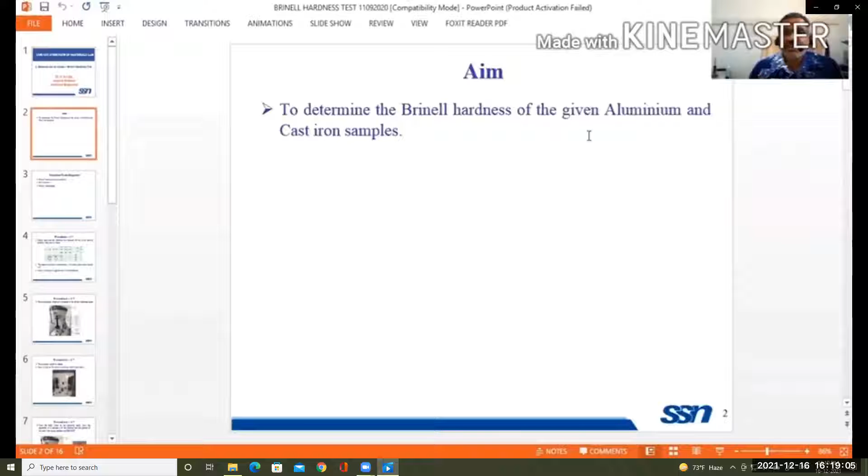This is a Brinell hardness test. The aim of this experiment is to determine the Brinell hardness number of the given aluminum and cast iron sample. Tools required are a Brinell hardness testing machine, ball indenter, and Brinell microscope.

Now the procedure: there are 7 steps. The first step is we have to fix the load and the duration of application of the load. Here there are 4 different metals given. The first metal we are going to use is ferrous. For ferrous, the corresponding load is 3000 kg and the time of load is 15 seconds.

Next, we are going to use aluminum. For aluminum, the load is 1000 kg and the time is 15 seconds. So for steel we use 3000 kg and 15 seconds, and for aluminum 1000 kg and 15 seconds. These are standard values. Next,

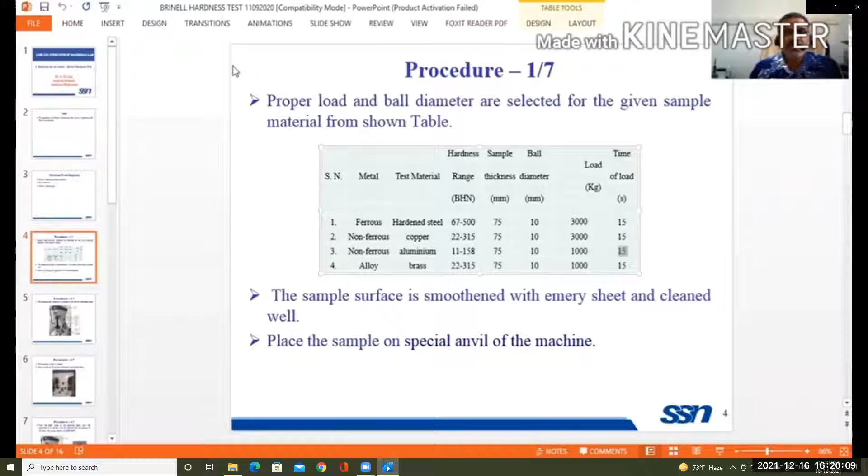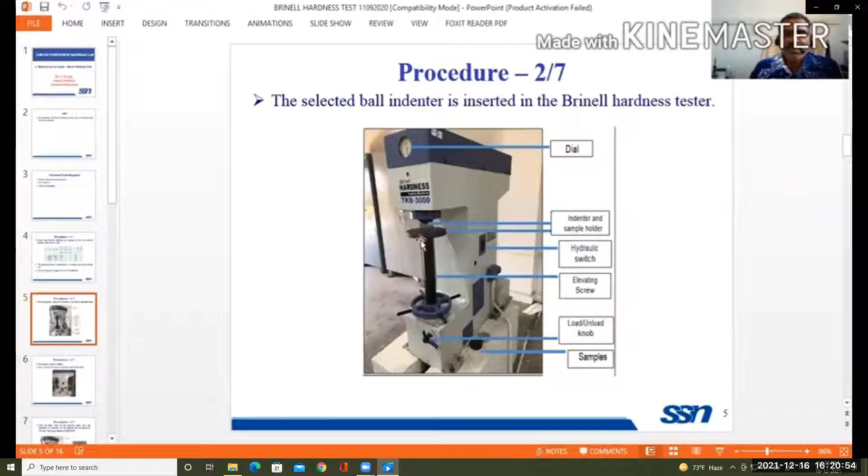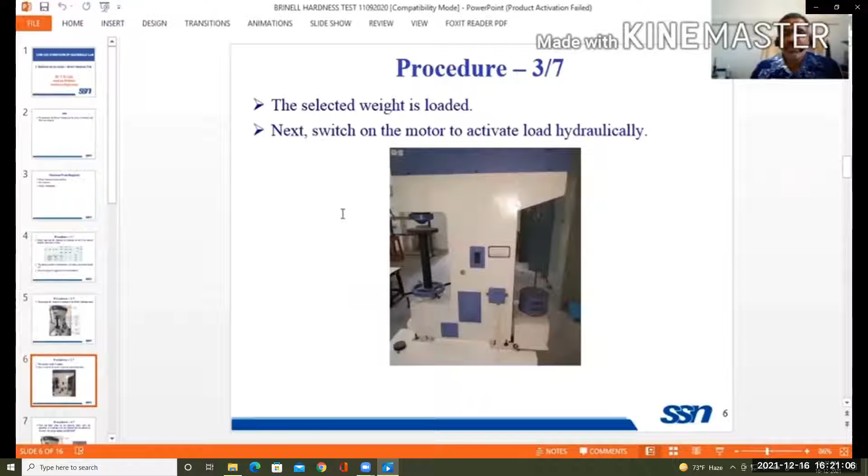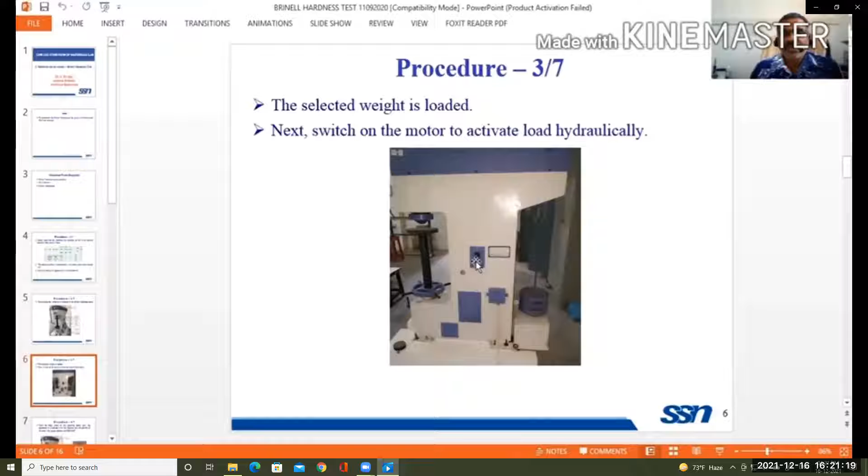Here we have the loading and unloading knob. When you rotate it clockwise, the load will be applied on the workpiece by the indenter, and if you unload it, it will be removed. Next, you have to select the weight. I already told you how much weight is to be applied. This is where you apply the load: for aluminum 1000 kg, and for steel 3000 kg. After that, you press this button and the load will be applied. It's a hydraulic system.

Here is where we fix the workpiece. By rotating the wheel, the screw moves upward, and the workpiece comes in contact with the indenter. Once the indenter has initial contact, see, there is a big dial, inside it a small dial, and an indicator. When the initial setting is over, it can be confirmed by the indicator: the indicator has to reach the red spot. Now the initial setting is over.

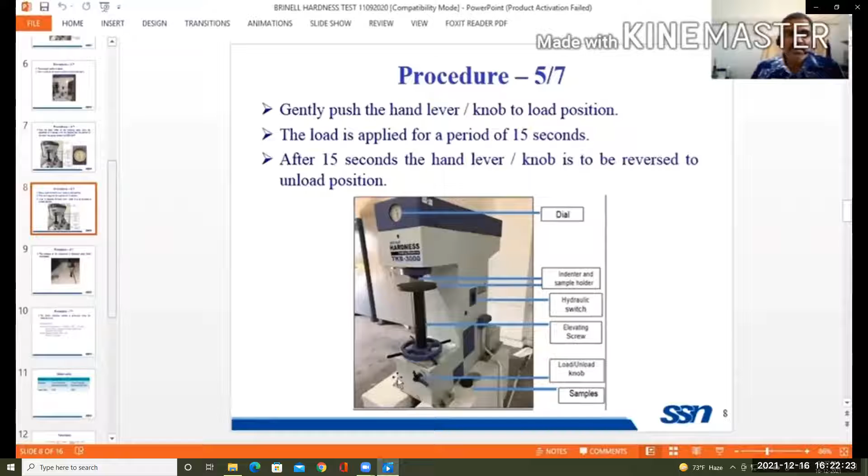After that, we have to apply the load. This is the loading knob. Rotate it clockwise, the load will be applied, and you wait for 15 seconds. After 15 seconds, you remove the load. After the load is removed, you take the workpiece, and this is the Brinell microscope.

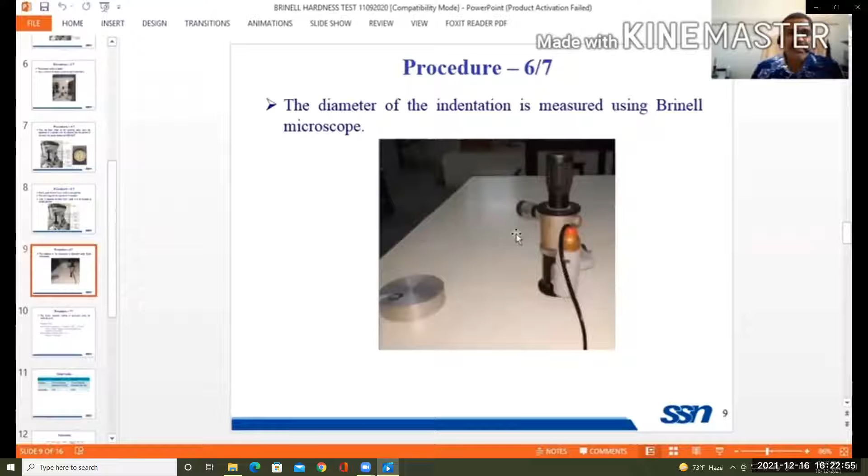The purpose of the Brinell microscope is to measure the diameter of the indentation. After the indentation is formed, you use the microscope to find its diameter. We already know the diameter of the indenter: it is 10 mm. After that, you have to do the calculation.

So the Brinell hardness number is load divided by area. Substitute the area in millimeters and the load in kg. It will give you a number without any unit, the Brinell hardness number, which gives the indication of hardness.

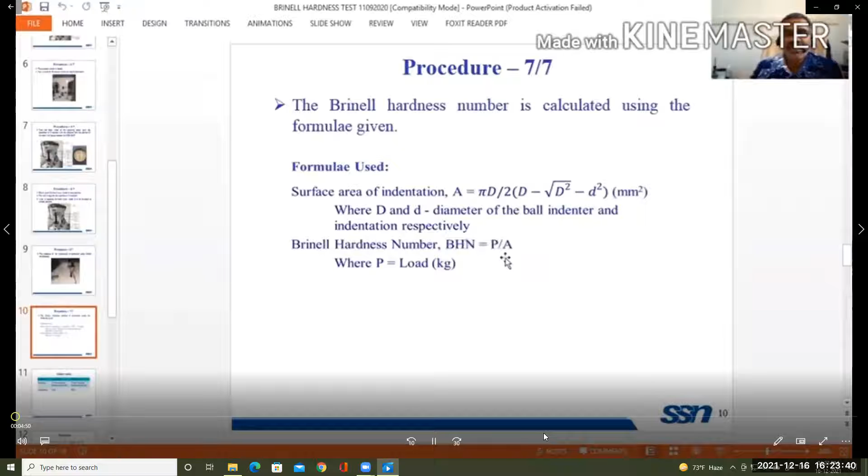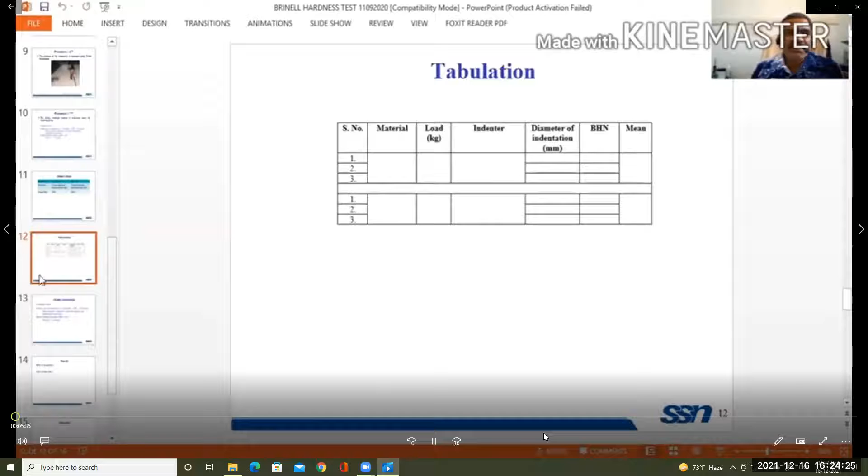Then you have to write the mean. We have taken only one reading. You write that reading. So this is the equation for calculation. Finally, results: you write the Brinell hardness number of aluminum and Brinell hardness number of cast iron.

Good morning. So this is the Brinell hardness experiment. This experiment is also used to calculate the hardness of metals. In the Rockwell hardness, we have seen how to calculate hardness of steel and aluminum. So here also we are going to calculate hardness of steel and aluminum only. But the thing is, this is another procedure.

As I told already, there are different scales available for measuring temperature: degree Celsius, Kelvin, Fahrenheit. Here also, this is another scale. Already we have seen Rockwell hardness. This is Brinell hardness. So here there is a set of procedures to calculate the hardness of a material.

But here in Brinell, we are using one indenter. The indenter has a dimension. When some force is applied on the workpiece, it creates an indentation. So here there is an equation to calculate the hardness. The equation is a function of indenter diameter and indentation diameter. So the indenter has a diameter. When it is pressed against the workpiece, it will form an indentation that will have a diameter.

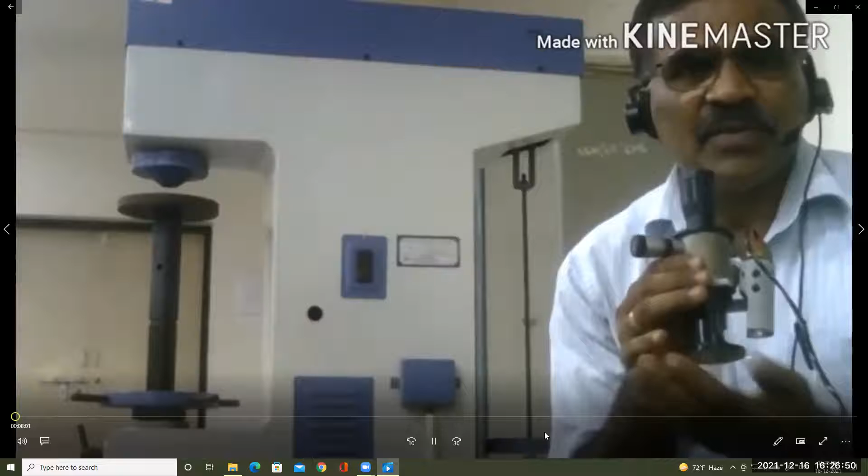indentation. So now we have the dimension of the indentation and the dimension of the indenter. By using these two, you will be able to find the hardness. So this is the procedure. The procedure is almost similar to the Rockwell hardness. But in the Rockwell hardness, the reading is directly given, but here we are measuring the diameters, and using the diameter we calculate the hardness. That's the only difference.

But the value may be different; it has another scale. So if you want to compare the hardness of different materials, you have to go for the same scale. Rockwell and Brinell cannot be compared. If you want to compare, you take the Brinell hardness for all materials. So it is a different scale. Now let us see how to do the experiment.

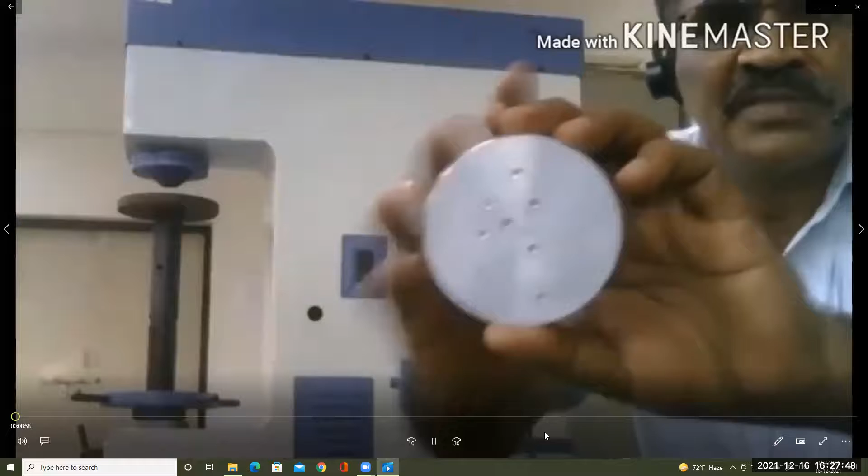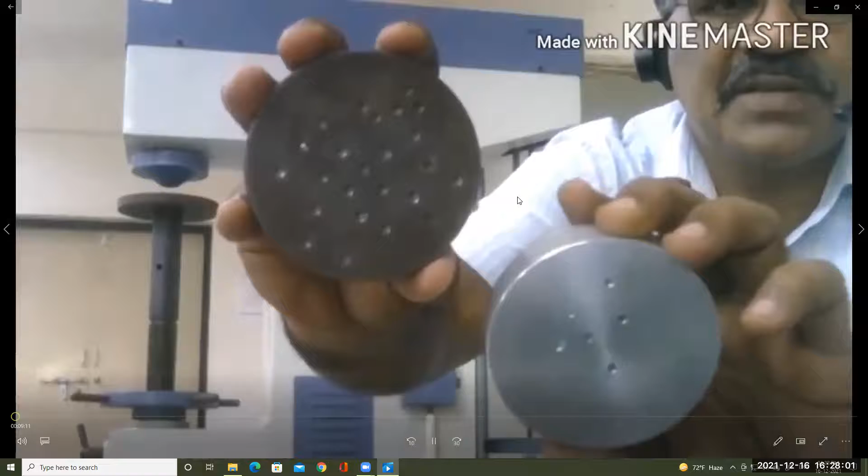So as we saw earlier, this is the aluminum piece. Sir, in the steel. This is the aluminum piece, and this is a steel piece. So now we are going to conduct the experiment on the aluminum piece as well as the steel piece. First aluminum. Here the loading conditions are different. The indenter is going to be the same for the two different materials, and the loading condition is different.

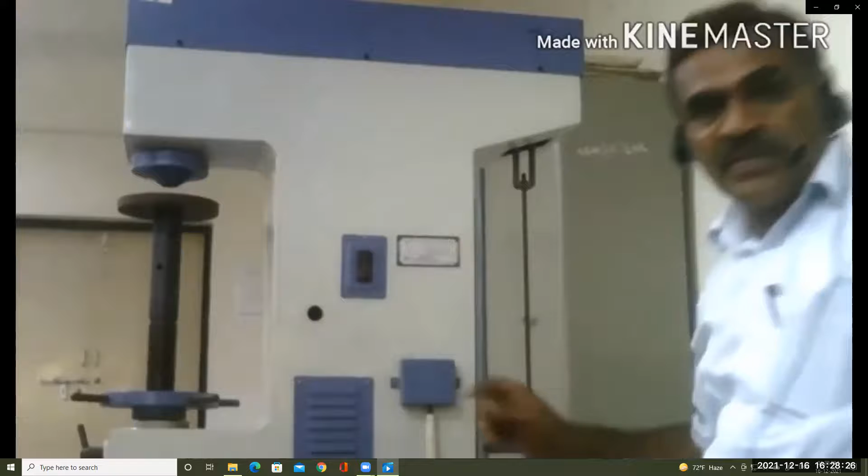For aluminum we are going to use 1000 kg. Here you have to apply the load. In case of steel, we are going to apply 3000 kg. In the previous case it was different, 100 and 150, but the indenters were different. Here, same indenter, but the loading condition is different. For aluminum it is 1000, for steel it is 3000. So you have to just follow the procedure. Now let us see how to do the experiment.

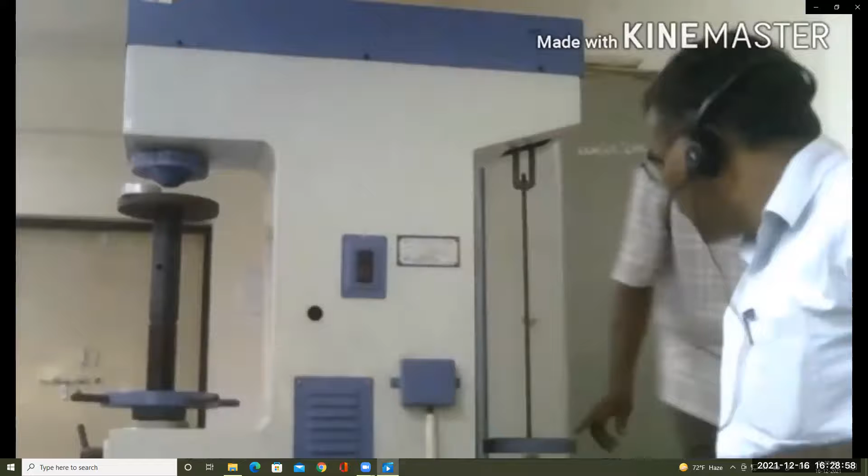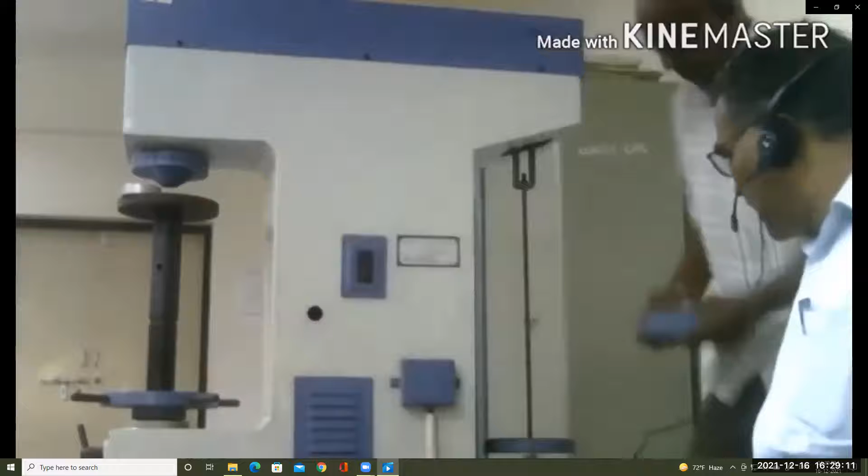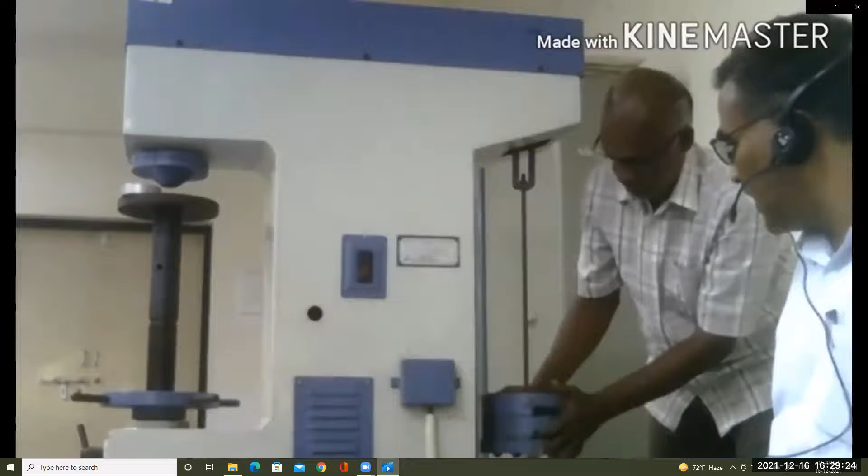Now here already 1000 kg is there. Sorry, 500 kg is there. We have 500 kg already. Now 250 kg we are going to put. This is 250 kg. So now 500 plus 250, it is 750. Again one more 250 kg. So now totally 1000 kg. This is for aluminum.

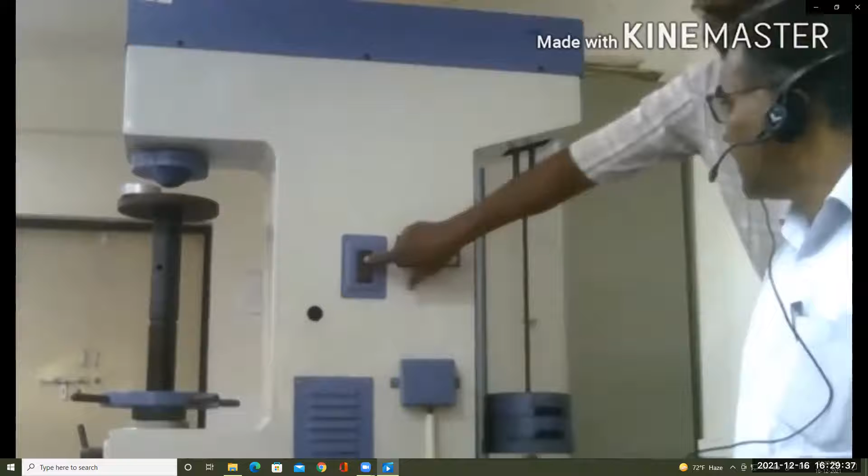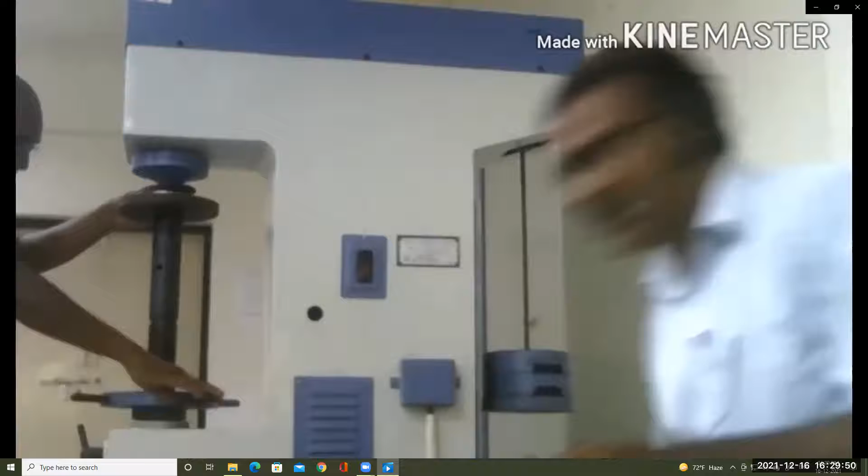Now this is operated by hydraulics, so you have to switch on the hydraulic mode. Yes. Now the load is applied; the hydraulic is on. Now he is fixing the specimen. See, so he is fixing the specimen.

If you rotate the wheel, the specimen is going upward. He is selecting a place where there is no indentation. Now it is just touching it. You have to give the minor load; that is the initial setting.

When he rotates the wheel, slowly it will go up. At the same time there is a dial. In the dial, it has to show 0. Till then you rotate it. Is it okay? Okay. Now it is 0.

So he was rotating the wheel. When you rotate the wheel, the workpiece is going against the indenter. A minor load is acting. At that position, the indicator is showing 0. So the initial setting is over now. Minor load is applied. Now we have to apply the load.

In the previous case, in the Rockwell hardness test, we applied the load slowly. There is no time. But here there is a time setting. Load has to be applied only 15 seconds. You switch on the timer, apply the load. Exactly at the 15th second, you stop it. You unload it.

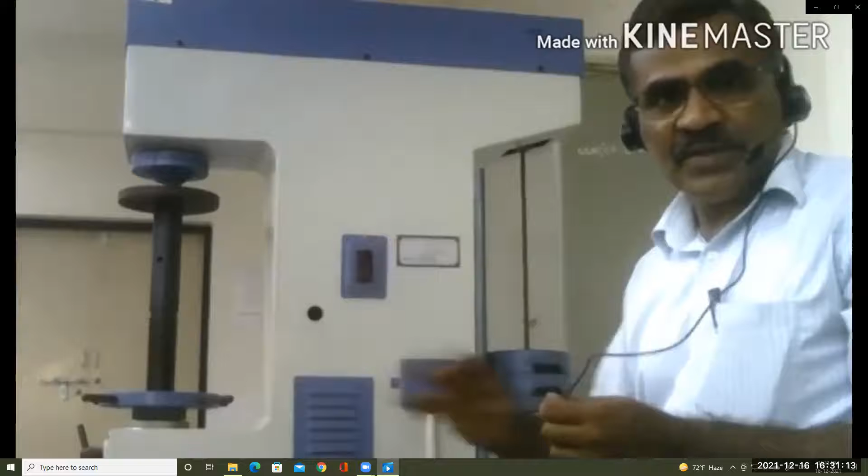Right. Now he is applying the load and seeing the time. 1, 2, 3, 4, 5, 6, 7, 8, 9, 10, 11, 12, 13, 14, 15. Time is over. Now it is unloaded. Now you can release.

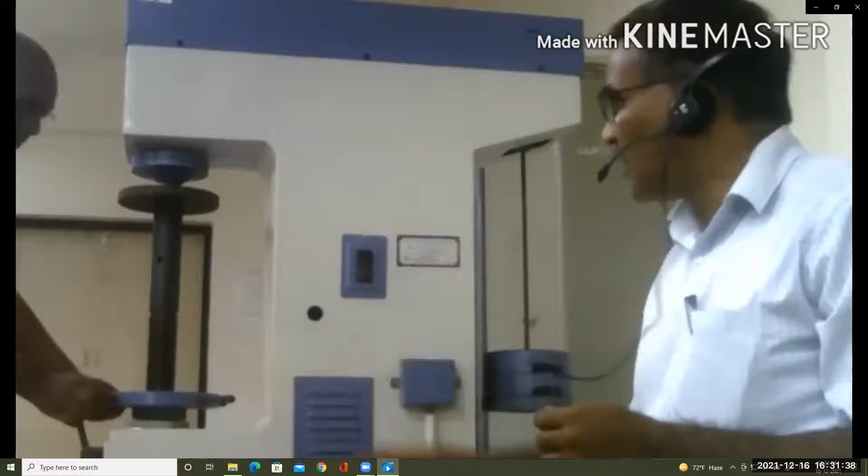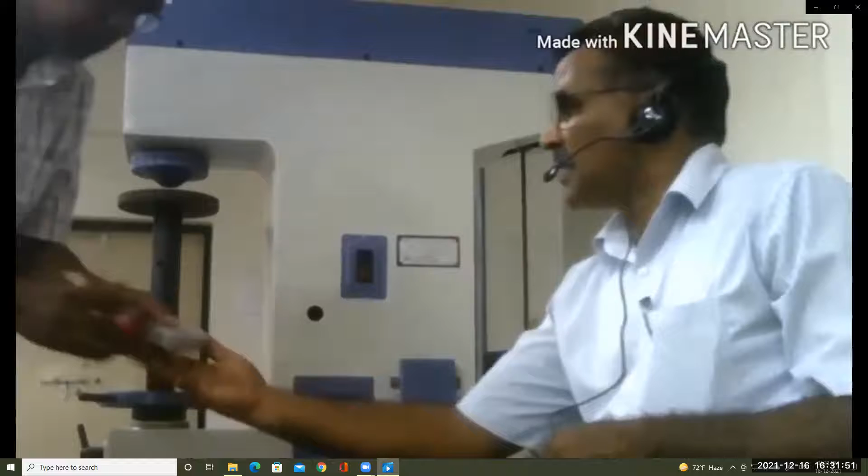Now the experiment is over. Now he is releasing it, rotating the wheel in the opposite direction. The specimen is coming down. Now he is taking the specimen. Now you can see this is an indentation. There's a circle. Inside the circle, the indentation is formed.

Now, what do you have to do with the microscope? In the microscope, you have to find the diameter. So this is a microscope. You keep the microscope on the workpiece and find the dimension. Now sir will measure the dimension and tell. Now he is finding the diameter of the indentation: 3.6 millimeter.

That can be measured using a small microscope. Already we know the diameter of the indenter is 10 millimeter. The 10 mm indenter is used to produce the indentation. The 15-second time was given for loading. So the diameter of the indentation is 3.6 millimeter. So using these two diameters, you will be able to find the hardness.

Diameter of the indentation and diameter of the indenter will give the hardness. There is an equation you can refer to.

Now we are going to test the cast iron specimen. Okay. You have already seen the cast iron specimen. Lots of indentations are there. You have to select another place where indentation is not there.

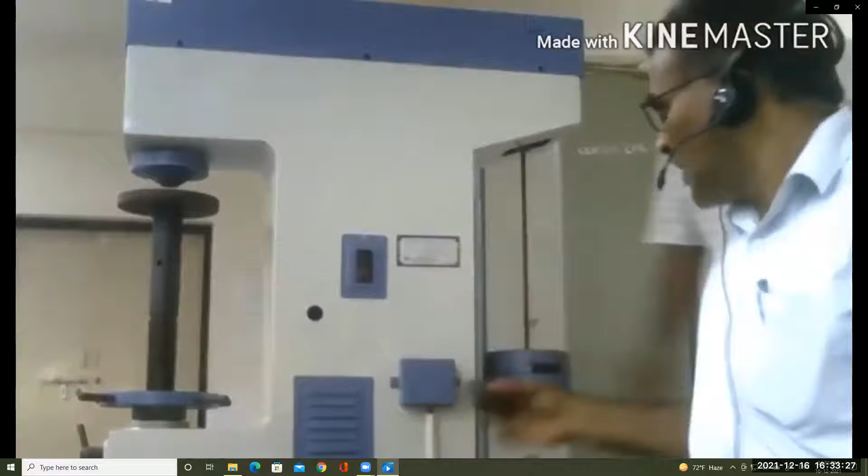So now he is going to apply the load. Already how much load is applied? 1000 kg is there. Now 2500 kg, 2750, and finally 3000 kg. Now 3000 kg is applied. Already it is in on position.

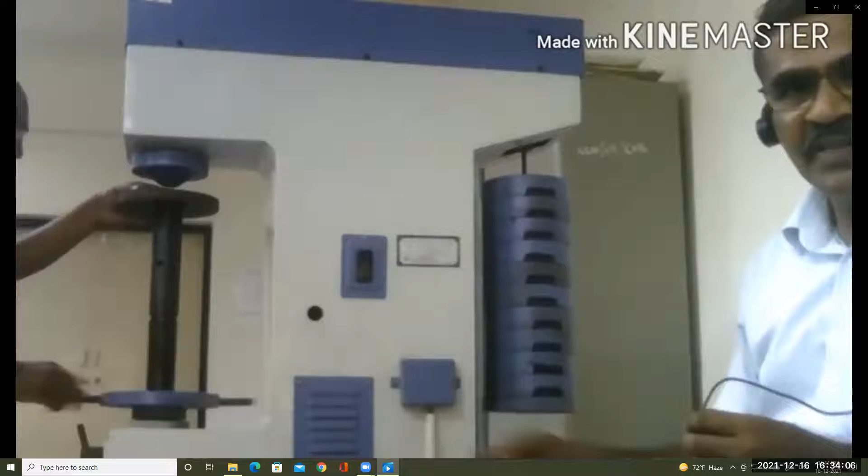Now he has taken the cast iron specimen. He is fixing it. Now he is rotating the wheel. You keep the specimen and rotate the wheel. Now it is in contact with the indenter. After having contact with the indenter, again you rotate for some time till the reading is showing 0.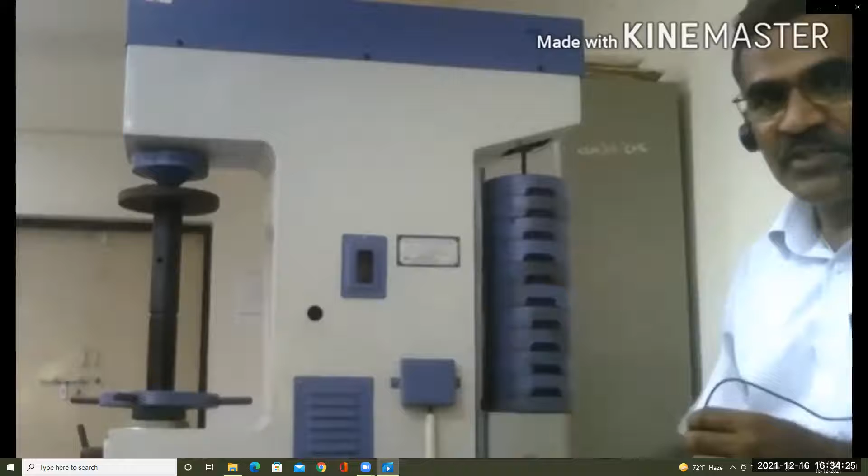Now the reading is also 0. So the minor load is given. Initial setting is over. Now we have to apply the load. How many seconds? 15 seconds. You have to apply the load for 15 seconds.

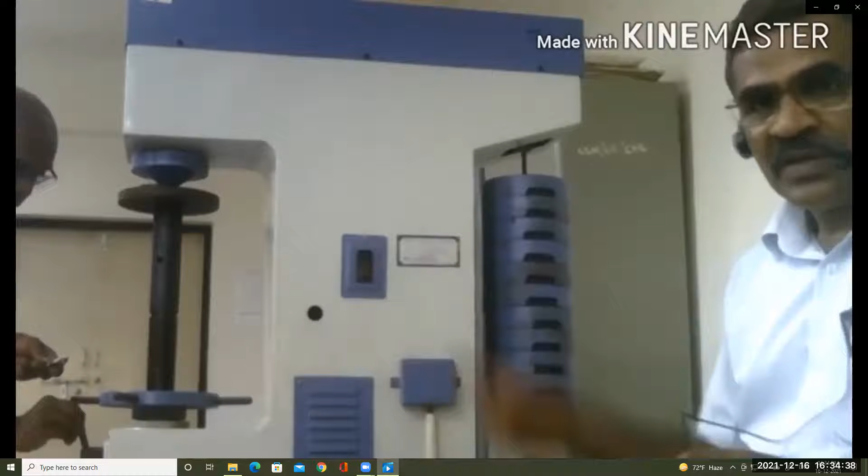Now he is applying the load. He is waiting for 15 seconds. 15 seconds is over. Now he stopped the loading.

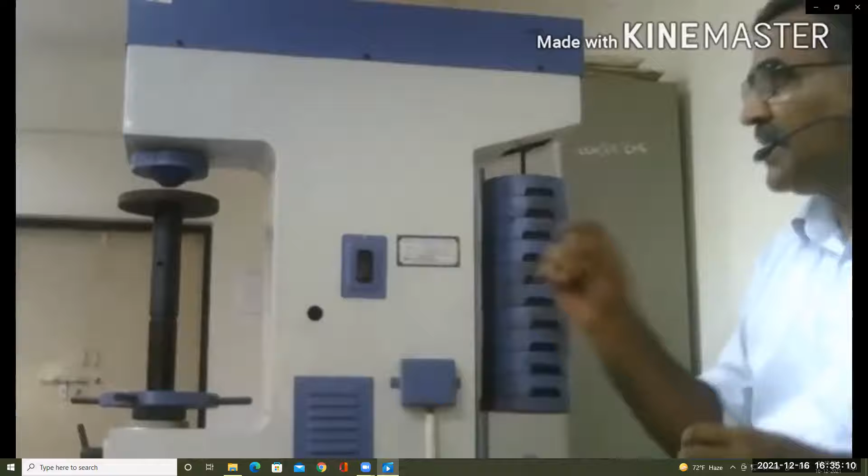Now you rotate the wheel. The specimen is coming down. You take the specimen and mark the indentation. Now you can see the indentation. Now it is marked in red color.

Now what is the next step? Next step is measuring the diameter of the indentation by microscope. By using the microscope, the diameter is measured.

It is 4 mm. Diameter is 4 mm. Now, already we know the diameter of the indenter. How much is the diameter? 10 millimeters.

Hi, this is a video session on Brinell hardness testing. Hardness is basically the resistance offered by the material against surface penetration or scratches. This property is normally measured in a material testing laboratory by evaluating the resistance of the material to local plastic deformation, which is obtained from the indentation of a predetermined geometry indenter onto a flat surface of the workpiece or part under a predetermined load. Hardness is one of the very important parameters in the study of wear of any component.

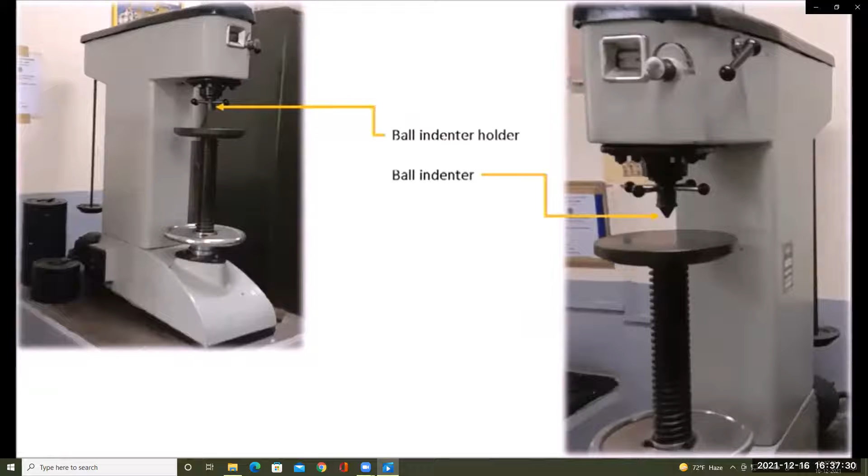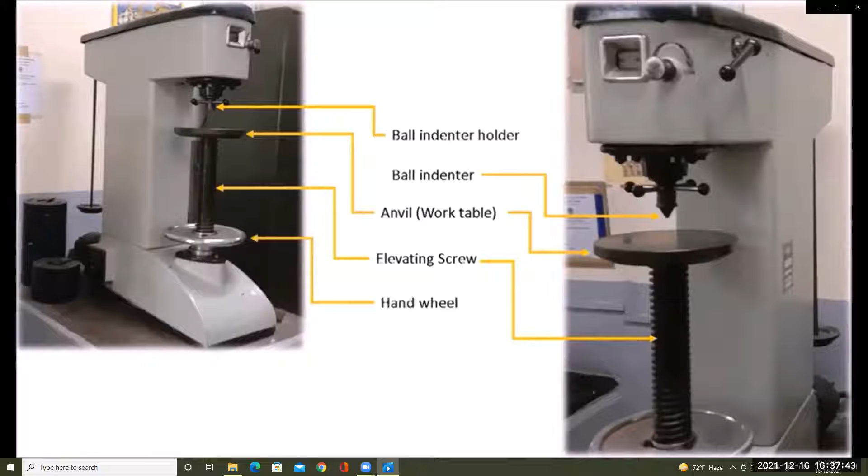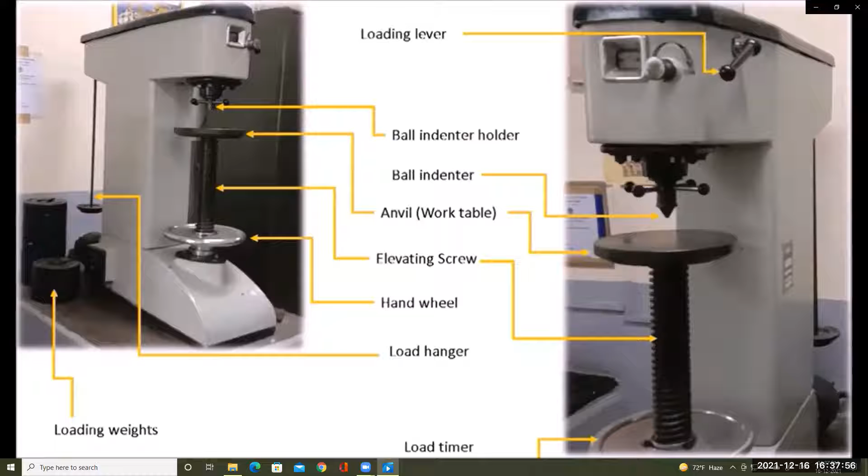Let us have a look at a typical Brinell hardness testing machine. It has a holder for the ball indenter, a ball indenter which will penetrate into the workpiece when the load is applied, an anvil or work table where the specimen is mounted during testing, an elevating screw for the vertical movement of the anvil, a hand wheel for operating the anvil, a load hanger at the back side of the machine, different loading weights, a lever for loading, a timer display and on-off switch.

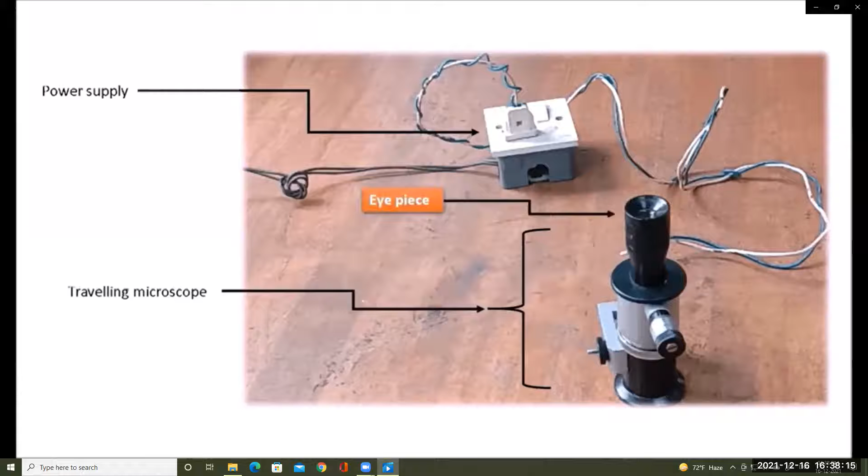Further, a traveling microscope is used for the measurement of indentation. It requires a power supply. It has an eyepiece using which the indentation can be viewed and crosswires can be adjusted. It also has a micrometer for recording the reading.

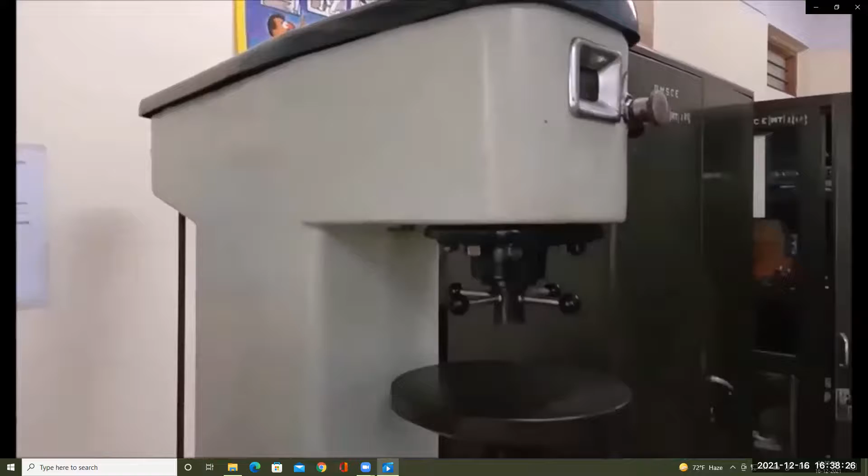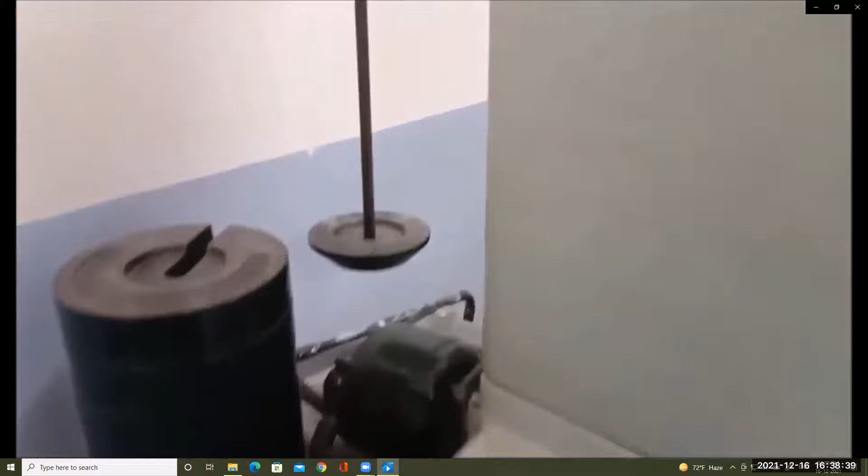Now quickly have a close look at all these parts of the setup. This is the Brinell hardness testing machine. And this is the traveling microscope.

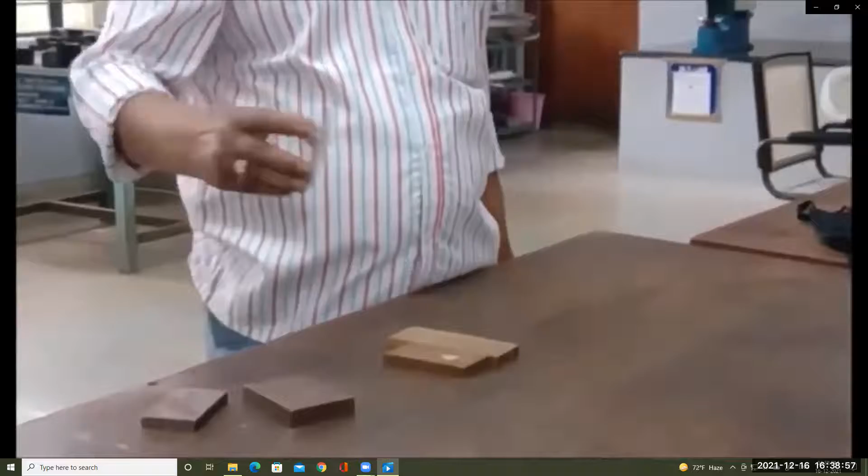Brinell hardness test can be performed on metals such as mild steel, cast iron and so on. Let us identify the different commonly used specimen materials. This is a mild steel specimen.

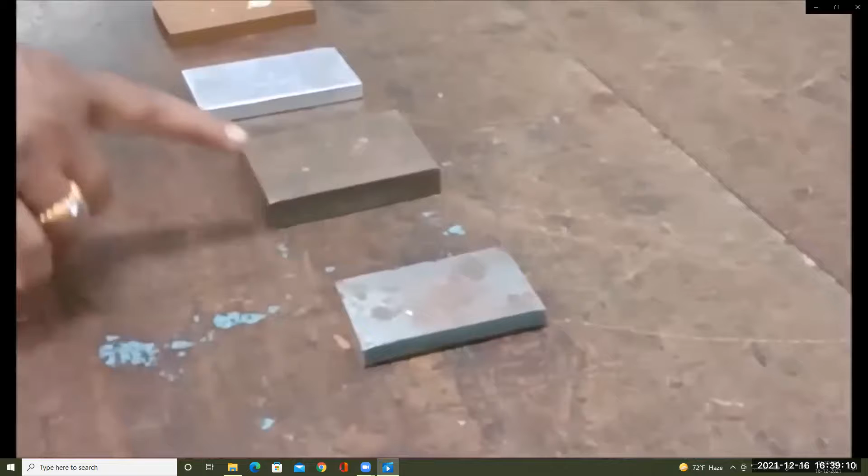This is how a cast iron specimen looks like. This is an aluminium specimen. This is a copper specimen. And this is the brass specimen.

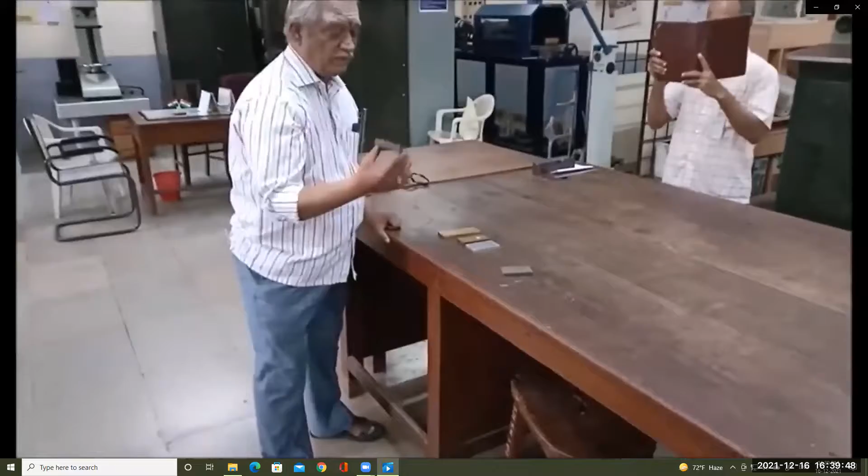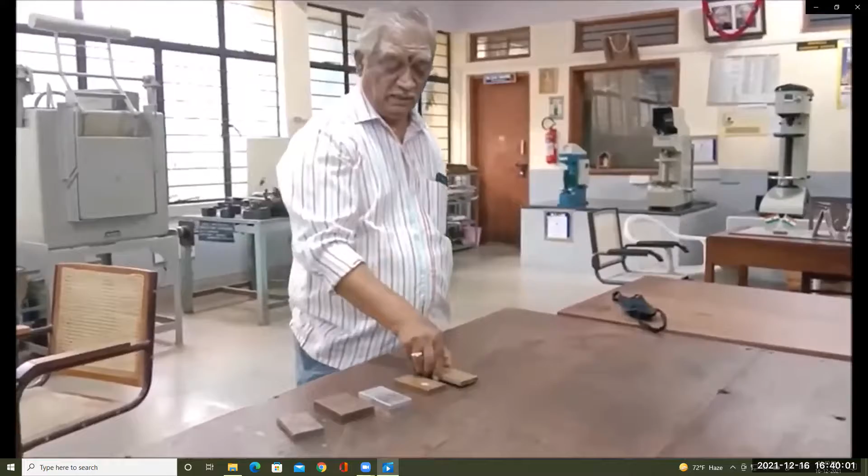One can hear a bell sound when a mild steel specimen is dropped on the flat surface. It will be a dull sound for the cast iron specimen. Aluminium is whitish in color. Brass is yellowish or dull gold in color. And copper is reddish brown in color.

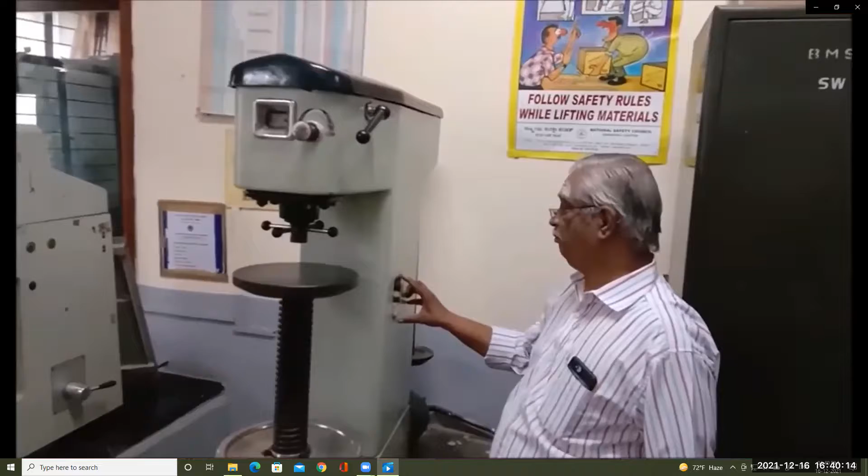This Brinell hardness testing machine has a capacity of 3000 kg. A 10 mm ball indenter is inserted into the holder. Here is the on-off switch. Grey button is on, red button is off.

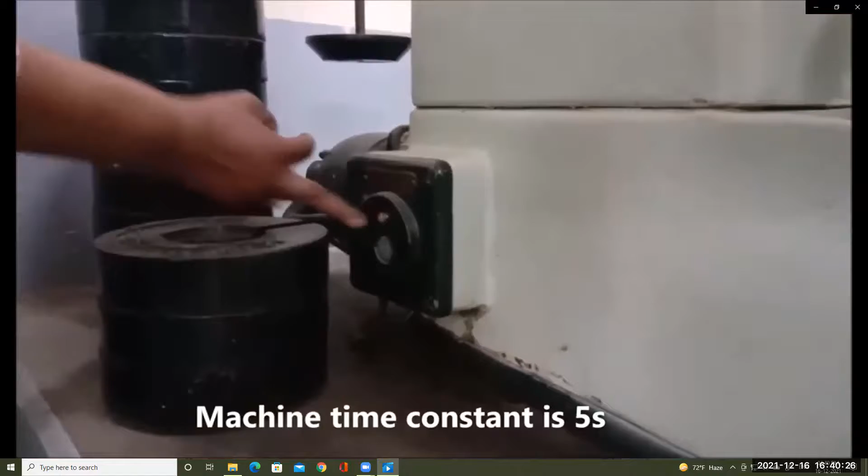Manufacturer of the machine has provided standard load values, duration of application of load, and the diameter of the ball indenter to be used for different specimens. You can see the details on the screen now.

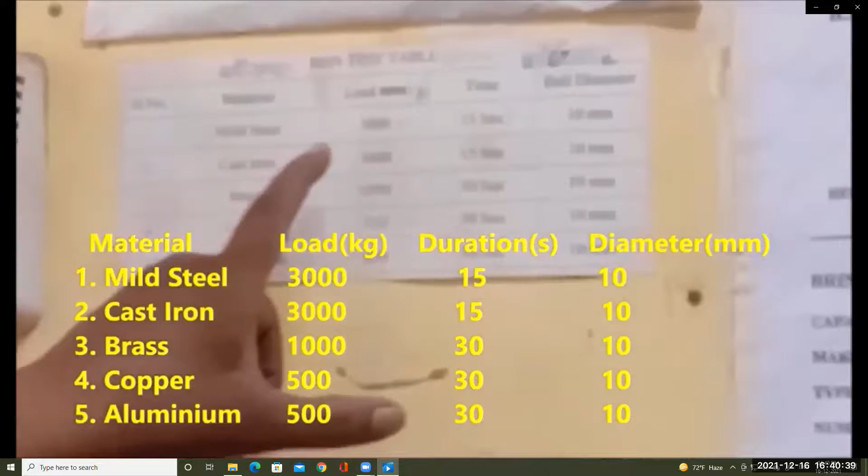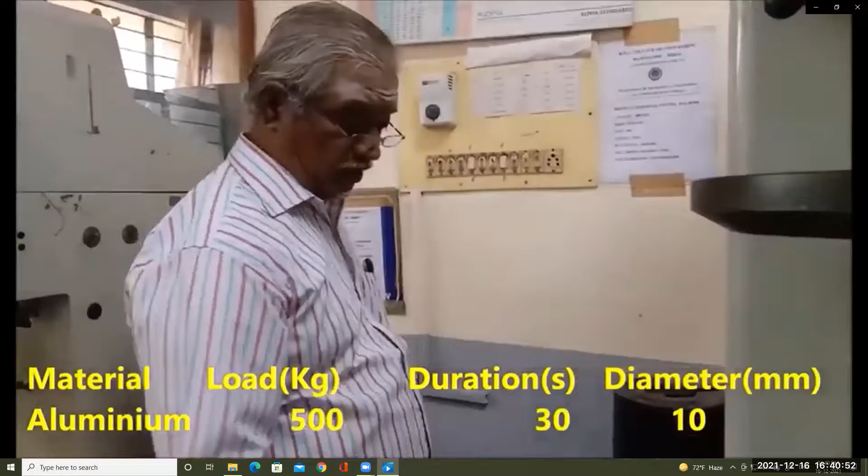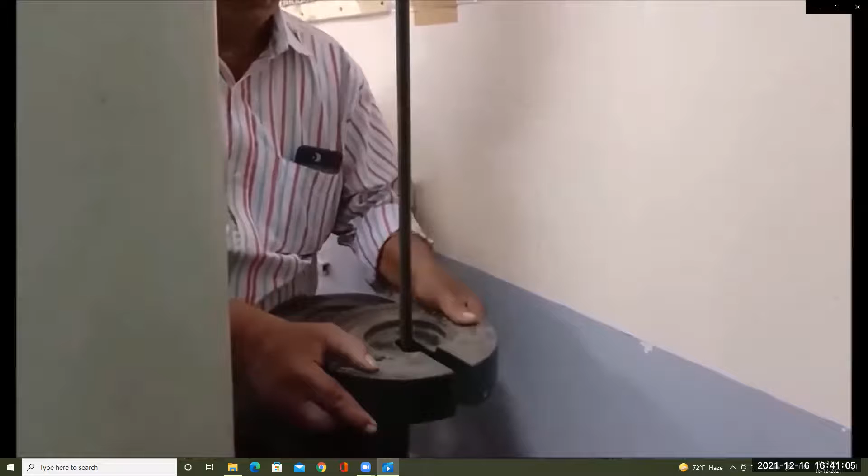Let us take an aluminum specimen for this demo of the experiment, for which we have to use a load of 500 kg for a duration of 30 seconds. Weight of the hanger itself is equivalent to 250 kg. An additional equivalent weight of 250 kg is added onto the hanger, making a total weight of 500 kg.

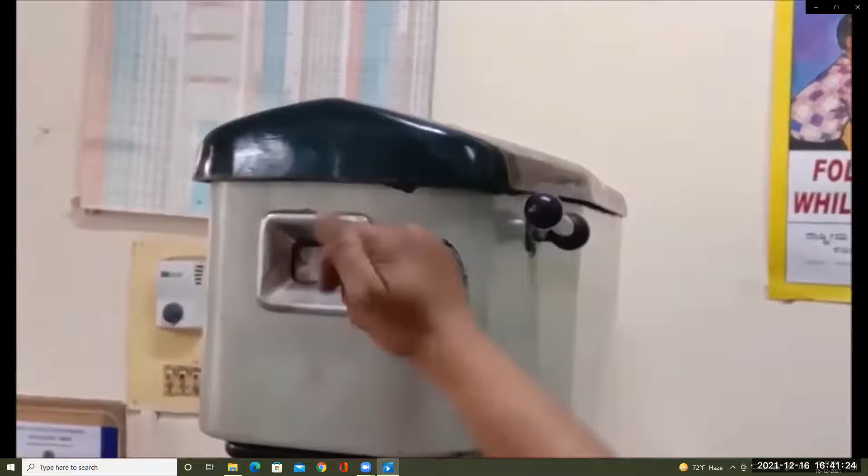By turning the knob near the timer display, you can control the movement of the display object from set to no set. Counterclockwise turning will make it faster and clockwise turning will make it slower. Now, by using a stopwatch, adjust the movement from set to no set time to 5 seconds. This is an initial setting for the timer.

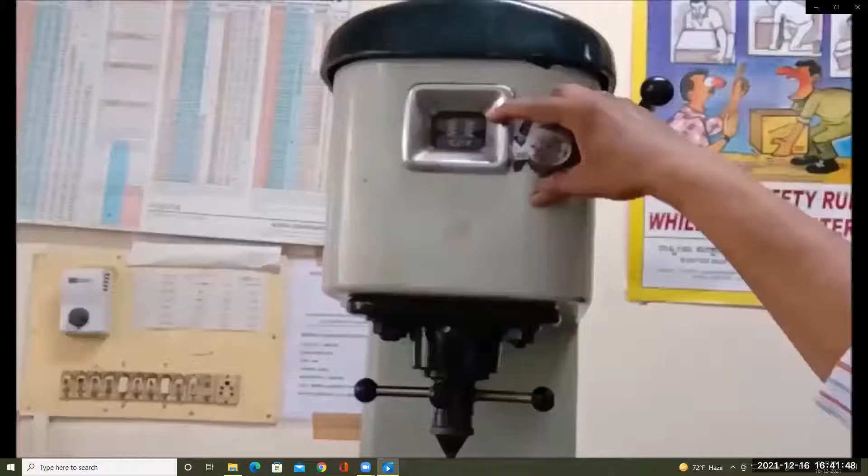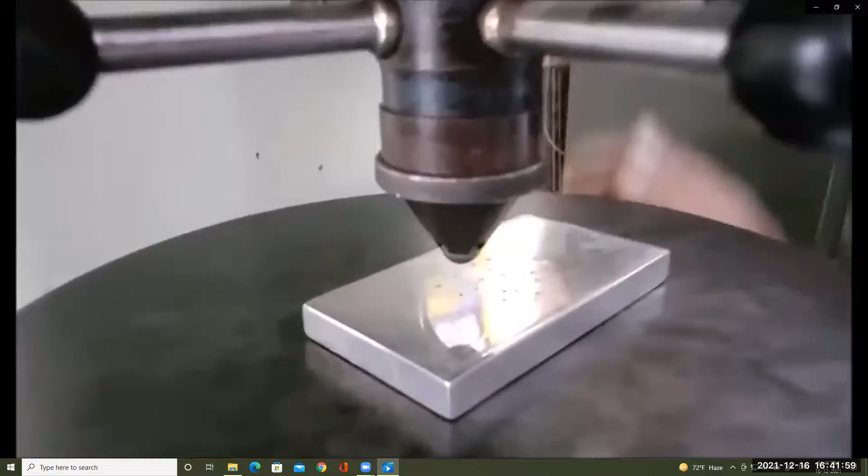Switch on the machine. Initially, make sure of the set position of the timer display. Position the specimen on the anvil. Turn the hand wheel such that the work table moves vertically up until the specimen makes contact with the ball indenter. Now, you can start loading the specimen by pressing the load lever down and starting the stopwatch at the same instant.

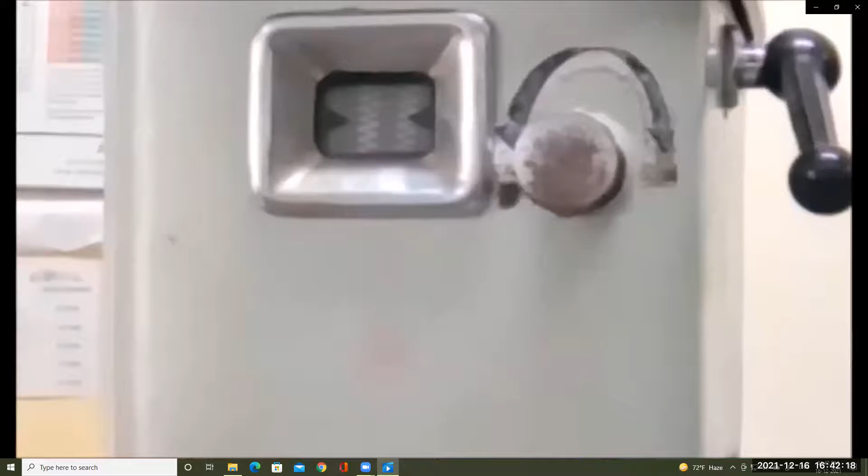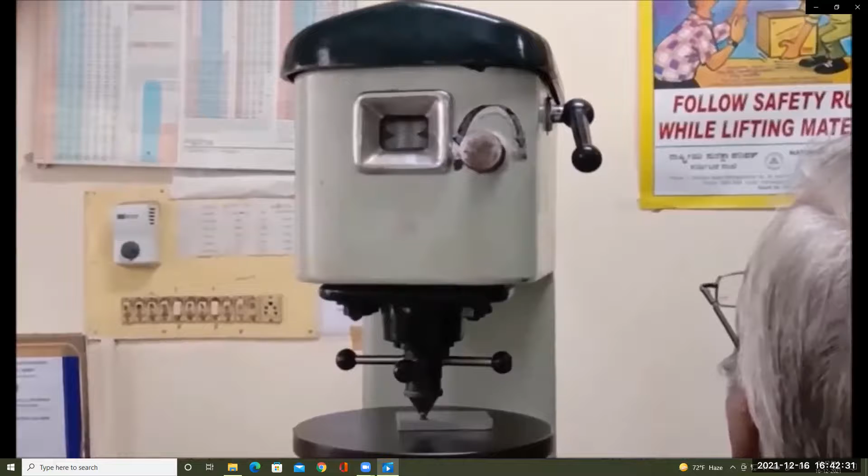After 30 seconds, unload the specimen by turning the load lever up.

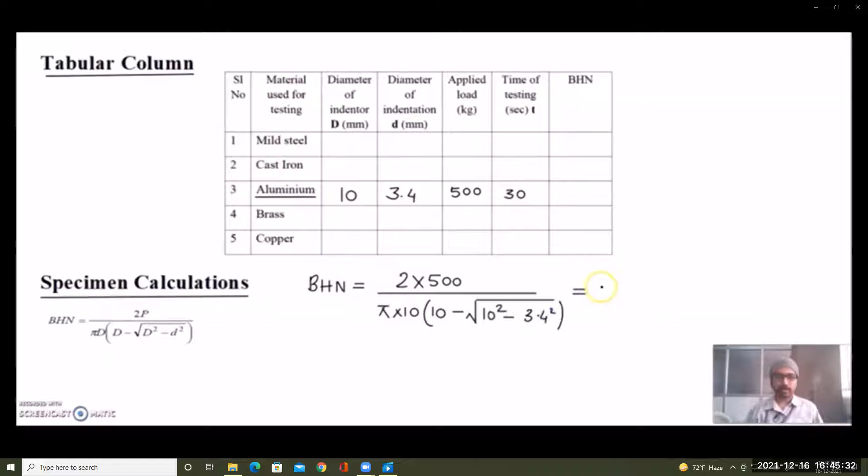Dear students, I am teaching you the course Material Testing Lab for 4th semester Mechanical Engineering students as per the syllabus. In this lab, we will study a number of materials and their varieties of properties. Understanding these properties is important because it affects the application, stability, and failure of the material. We can understand materials only when we understand their properties.

We shall learn about hardness, particularly Brinell hardness, how to conduct the Brinell hardness test, and what the Brinell hardness number is. What is hardness? Hardness is the property of a material to resist plastic deformation. Unlike toughness, where plastic deformation is allowed or beneficial, in hardness plastic deformation is not beneficial. It is the ability of the material to resist plastic deformation whenever subjected to load, in particular compressive loads.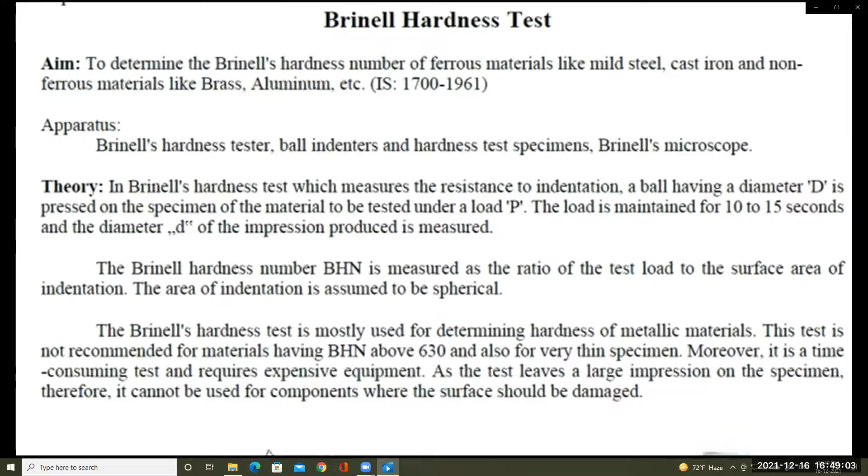This is the hardness testing machine we are observing here. The specimen will be placed here, and load will be applied with the help of leverage in terms of kg force. Upon applying the load, there will be an indentation made with the ball indenter, and that indentation is viewed under a microscopic view.

There will be a circular penetration. We have to calculate the diameter of the circle in the horizontal direction as well as in the vertical direction. After calculating the diameter of the circle, we substitute the diameter of the indentation into the formula so as to obtain the hardness.

After indentation, it will look like this. We have to note down the diameter, then apply it in this particular formula to calculate the hardness. Small d is the diameter of the indentation, and capital D is the diameter of the steel ball.

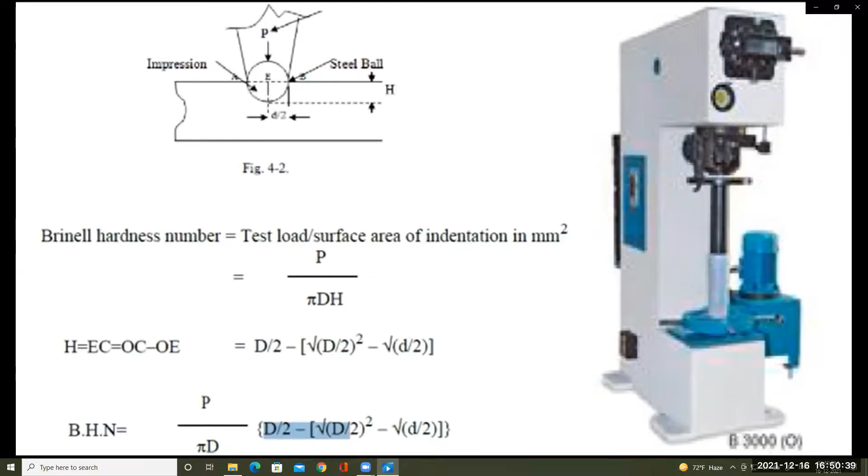What is the procedure? We place the specimen on the anvil, then raise the anvil by hand until adjustment is made. Select the ball diameter depending on the type of material used. Apply the load gradually for up to 15 seconds, then release the load. Repeat this 3 times.

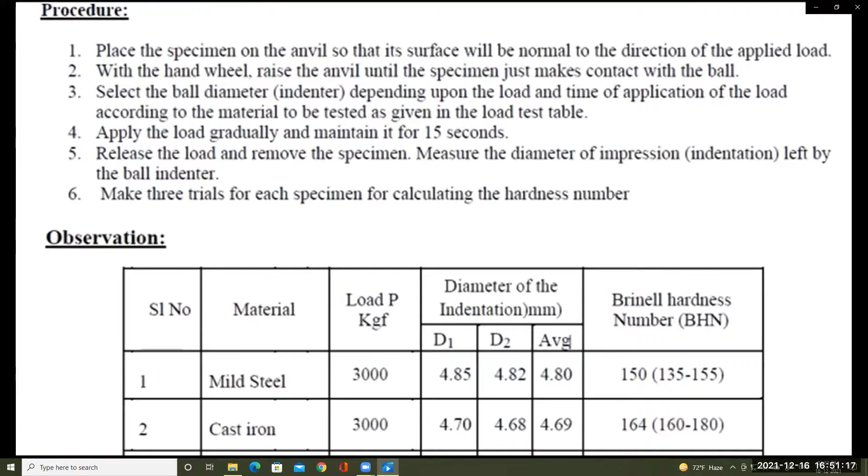Capital D is the diameter of the ball indenter, and small d is the diameter of the indentation, measured in both horizontal and vertical directions. We take the average of the horizontal and vertical measurements as small d, the diameter of indentation.

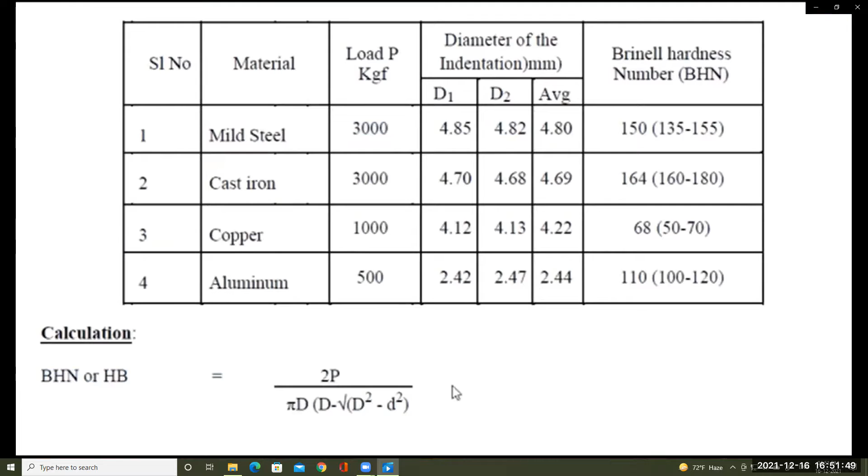Applying this formula, we get the BHN, Brinell hardness number, also denoted as HB. Both are notations for Brinell hardness number. P is the applied load, that is 3000 kg force. So the result will be a number. Hope you understood. Thank you.

We saw two hardness testing experiments earlier. The experiment we are doing now is the third one, called the Brinell hardness testing experiment. Here we use a ball indenter with a diameter of 10 mm, and we are again testing 4 materials.